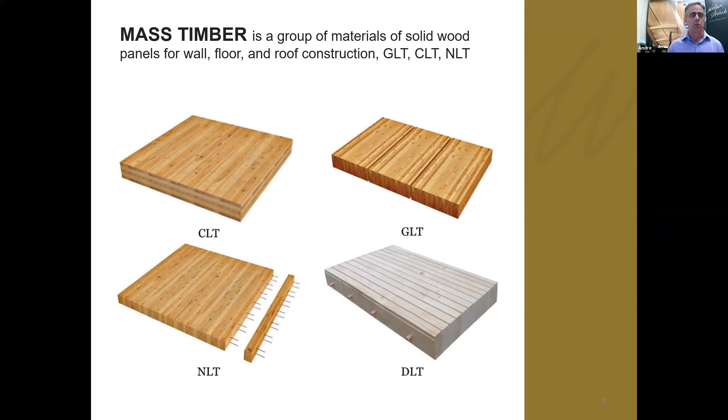So quick definition about mass timber. It's a bit of an interesting one. Mass timber is really heavy timber, but for marketing, they've called it mass timber, I guess. It's typically a group of materials, solid wood panels that have the higher fire resistance rating we're going to talk about. Some of the 3-letter acronyms: CLT, GLT - cross laminated timber, glue laminated timber, which is the one we do and know about best. NLT, DLT, and I'm sure there's some other LTs coming soon in the world of mass timber.

So by definition, glulam is a stress-rated engineered wood product, and all of the glue laminated materials fall under CSA. The ones that are mechanically laminated, i.e. NLT or DLT, do not necessarily fall under CSA standards for manufacturing. Not that that's a bad thing, it's just different because ours is processed, it has to have quality control checks to be sure that it's made the way it's supposed to be made.

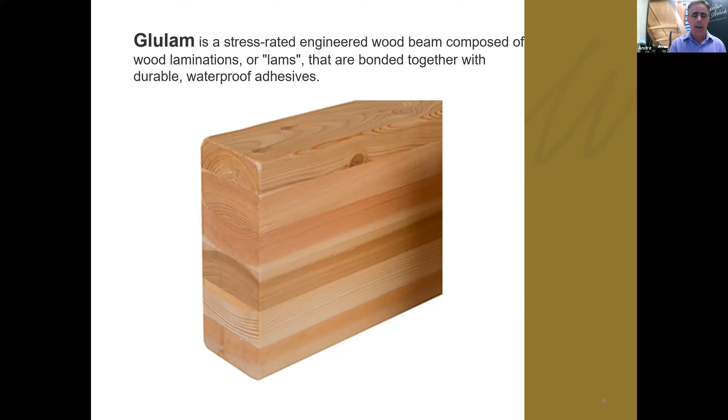So what's a major change most of you will have heard of, or that is in the proposal stage, depending on which province you're in? Alberta adopted it early. BC has adopted it in certain jurisdictions in the National Building Code, which made mass timber, or rather heavy timber, go to 12 stories. These are some of the sizes you see - I just threw it up there, I'm sure you're not supposed to do this with the building code, don't tell those people that I did this, but it gives you an idea. It's basically bigger pieces of wood that are allowed to be used to go higher, due to their fire resistance rating. We're going to talk about that a little further in the presentation.

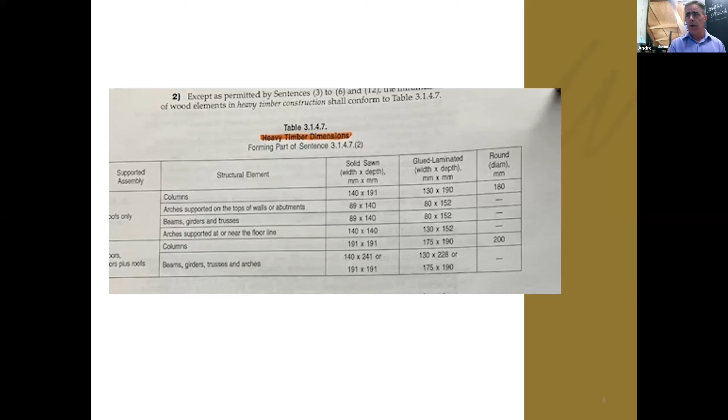But here's a mass timber project underway. They're mass timber, they're big pieces of wood.

This is just west of Edmonton, where I'm located. Quick commercial: we have two manufacturing facilities, one in Manitoba and one in Alberta. What we make is glulam. That's all we make, and that's what I'm going to talk about mostly today.

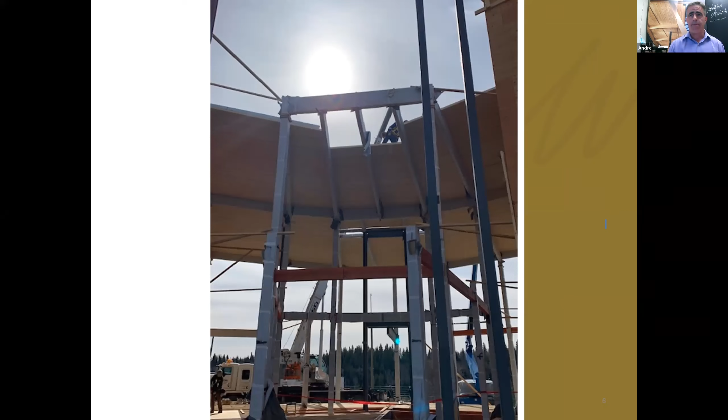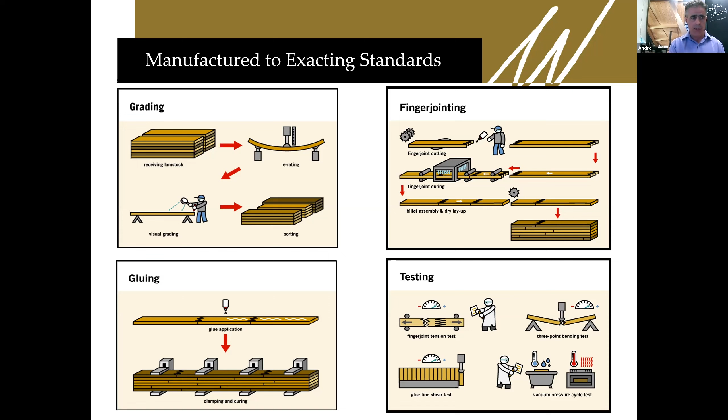As a manufacturer, this process remains similar for many of the mass timber products. All the material's graded, depending on it. It may be finger jointed - this is the glulam example I'm giving you - then face bonding, and then the testing I was talking about. There's kind of four or five, depending on which side of the border we're working on, as to how many actual tests for the product are involved.

So how do we get here? What's going on? What's changed? What's new in this wood world?

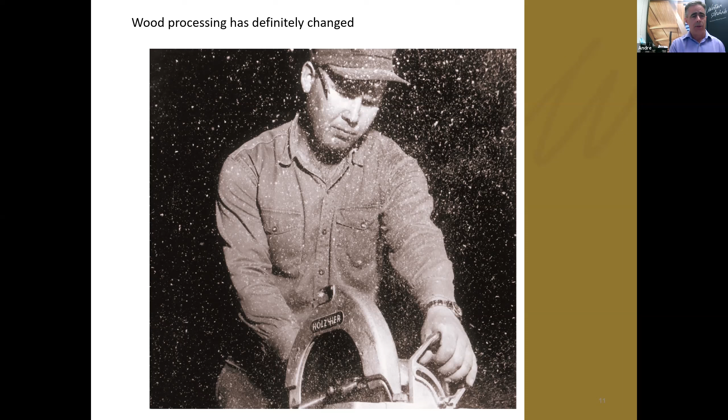This is an interesting picture - this was our plant foreman from many years ago, Robert Schneebacher. All our stuff used to be done manually with power saws and hand tools. Now it's moved to more of this big style - you can't even see the machinery inside of it very well. I'm going to show you another picture of it lately, but gantry-style CNC manufacturing has really changed how we do things in a big way.

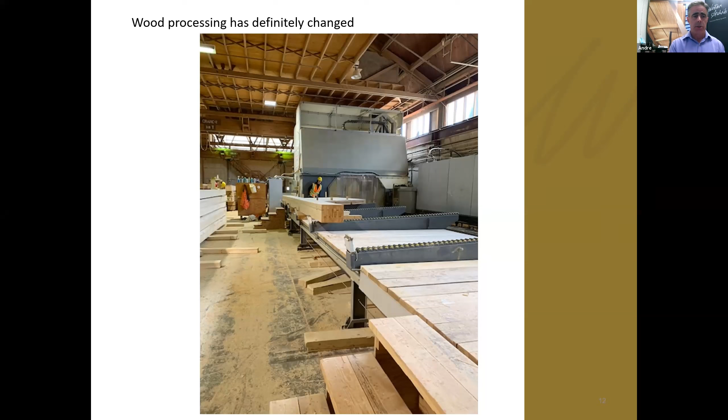So I'm going to try and run this video - I apologize if it's a bit jerky. It actually operates pretty smoothly, but this is the kind of stuff it spends its day doing, making sawdust and wood chips. It's got all kinds of little things it can do that process the wood in really, really cool and interesting ways.

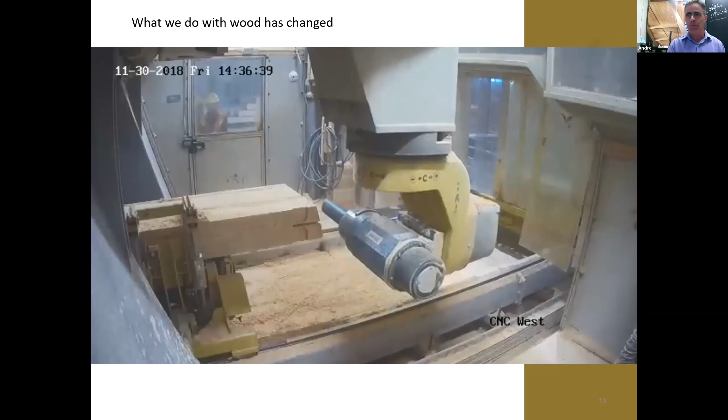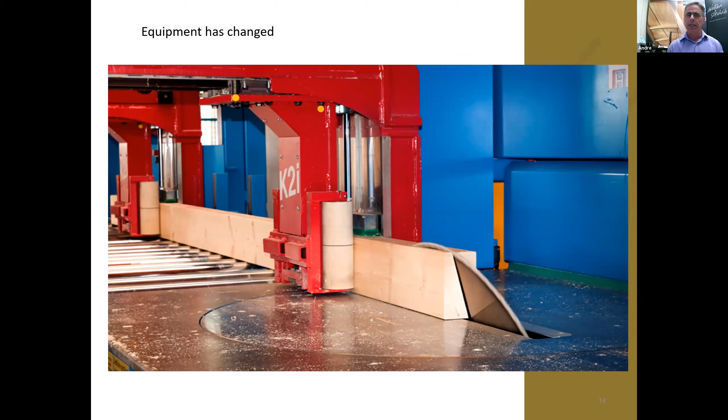This is, believe it or not, a bit of an older-school CNC processing machine called the K2i. Some of you, if you have truss plants, would know the K2i or the Hundegger Corporation for some of your other cutting. This one incorporates a lot more of the milling and the drilling that we do.

I was in the shop the other day and I came across these tools out for sharpening - drills and grinders and routers and all this stuff. The machinery I showed you reaches up and grabs a tool, one of these, and does a cut or a drill or a mill. It does some amazing stuff that would have been difficult to do economically years ago.

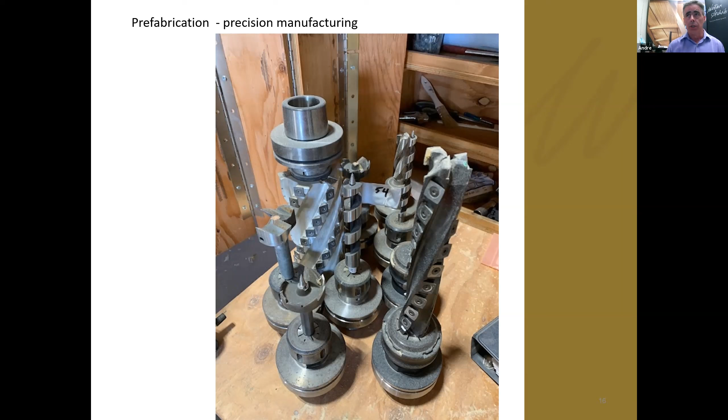Now, if the CNC can do it, it'll get done, and it gets done right. So the 4th industrial revolution, they call it, with robotics - it's on its way, and it's made its way to the wood industry too. This one is actually up and operating in our plant. It uses all the tools I just showed you on the end of its spindle. These can come in a number of different sizes, but it's changed how we manufacture and how we process what we do, and how we do it.

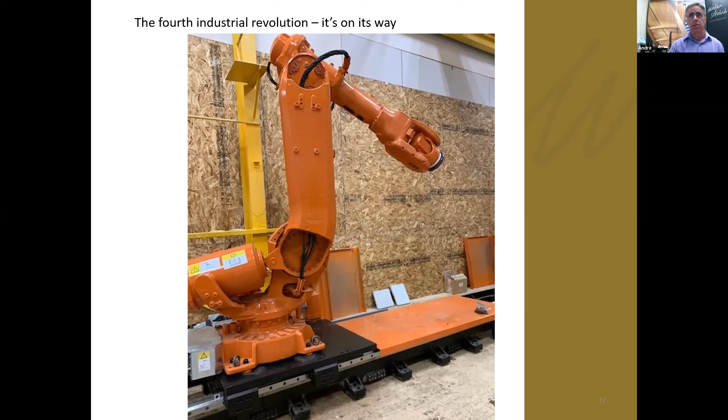Some of the other things we're looking at now is how do we get hangers installed with this piece of machinery in an efficient and effective manner. But the overall effect with the CNC technology is that it's changed how we do things, and it's changed what options are available. These types of really high-precision connections that came onto the market demanded that, as a manufacturer, our precision got really high, and we had to adapt because they were getting specified. You can't do it with hand tools anymore - it has to be done with a CNC for accuracy within 2 millimeters. By and large, if it's programmed correctly, that comes off the machine accurately 99-point-something percent of the time. It's really fascinating.

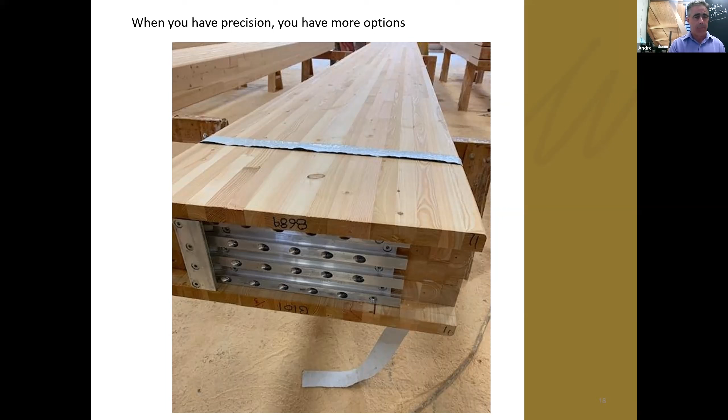So this is not a project we did, but I always like throwing this up because it's such a cool project in Spain. It just gives you an example of what can be done in mass timber given today's technology. This would have been very difficult without some of the tools we have today - not impossible, but difficult. And today it's not commonplace, this style or this budget, but it can be done.

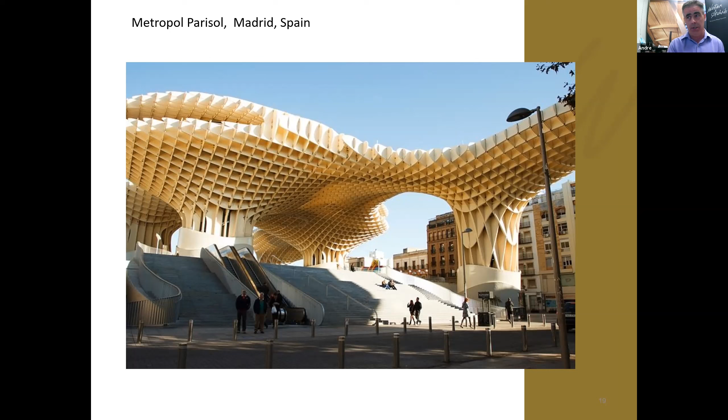So why wood? What's going on in our world that has changed why wood is being used so much more? And this relates to not just mass timber, this is all wood products. One of the things we're seeing out there was a whole two-day seminar about biophilia. If you don't know what biophilia is, I didn't know before I heard the term either, and that was just recently. Basically it's our human connection to natural products, so wood, stone, things we saw in nature that are maybe somewhat genetic in our acceptance of their look and appreciation of their beauty. And we always do it ourselves.

We always like a wood table or a stone table and that sort of stuff. Natural wood products give us that connection with nature and basically make our working or living environment more palatable. The studies that go with that say you're more productive and you're a happier person in a natural environment. So this is some of the message, not my message. I agree with it, but it's definitely a big push out there.

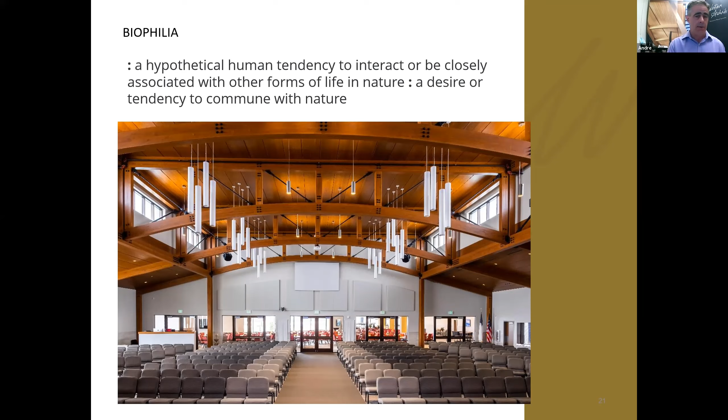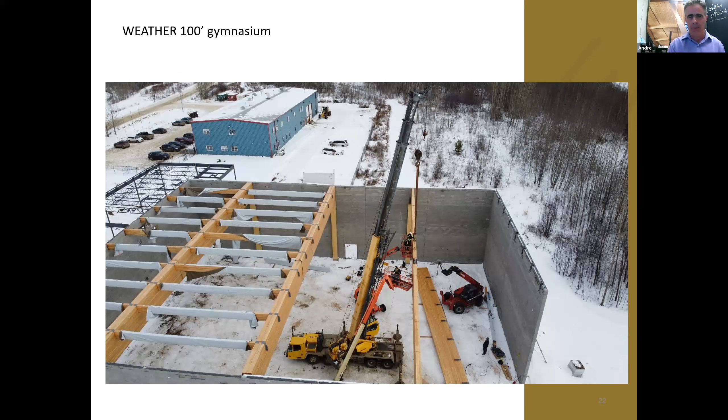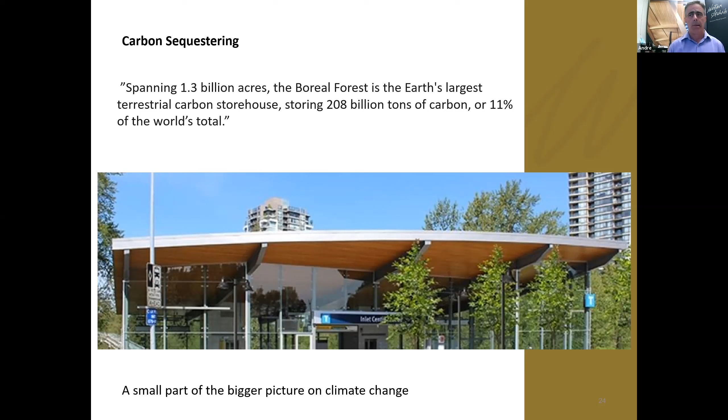Just a little bit about glulam, small pieces, almost fence post styles if you will, up to 150-foot arches that I'll show you another picture of those going down the highway. These are for a potash storage building in Saskatchewan where they all are. So lots of diversity on what can be made.

This sometimes comes as a surprise to people how big glulam can be made. But it is, this one's 150 feet long. We just did a proposal a few years ago for 175s, and we think we could do a 175 footer as well. So maybe longer yet.

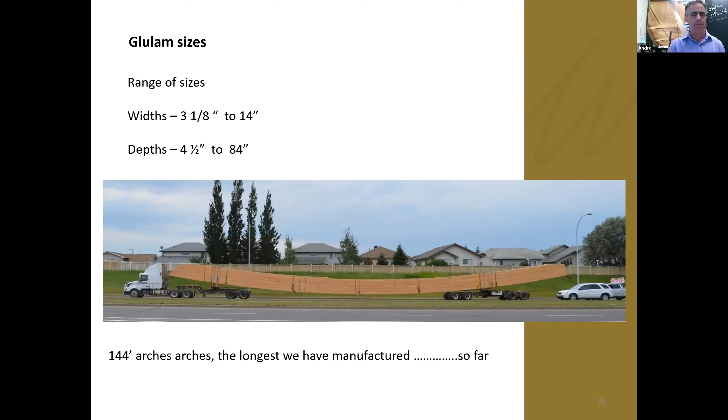So what I talked about earlier, what's changed in our industry, what's changed in wood - the CNC manufacturing doesn't come alone, it always comes with a model. So now 99% of our jobs are done with a model. The model gives us our coding for our machinery so that we can put together a complex structure. That's part of what has changed in our wood world.

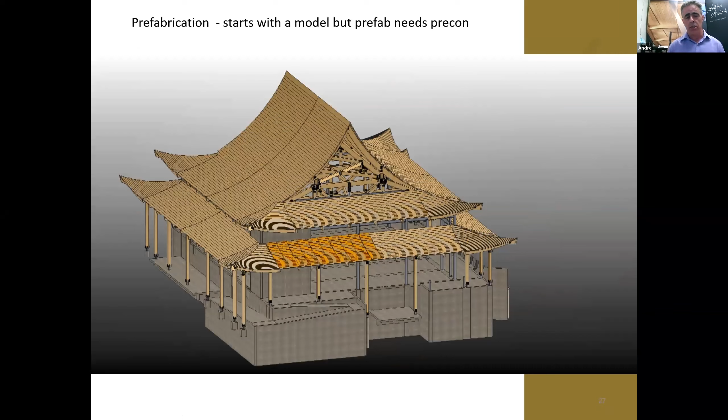The truss manufacturers have been doing this for equally as long, and the technology has followed them as well. This type of model, this is actually just a presentation model, but of course it dives into the details of all the connections, all the member sizes, all the finishes, basically everything about it. We're even seeing guys on site now with an iPad with the model on it, and they can visualize, zoom into a connection, and see exactly how it's supposed to be built.

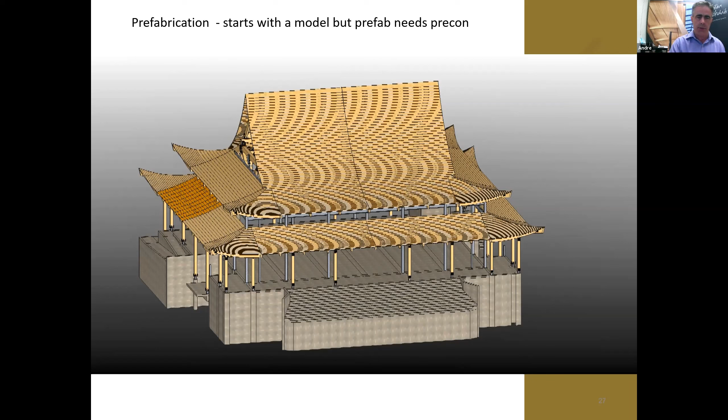And there's the product being installed, in this case a Buddhist temple here in Edmonton. Just to give you a feel for the size of it, it was an interesting project.

It was originally a steel roof that they had designed. They came in way over budget. They said, 'What can you do with this? This is how much money we've got.' And we said, 'Well, here's what we would do.' And we built it in a couple of stages.

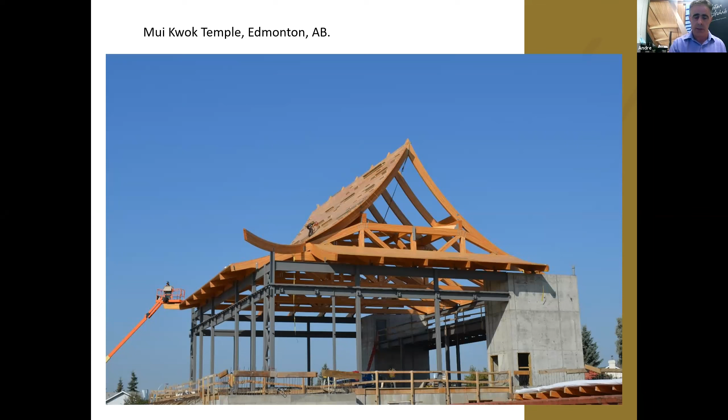You can see the truss, it's a 4-truss system, and then cross braced, and then rafters that swoop up at those nice curved angles that made up the roof, and mass timber ceiling in this case as well. In fact, glulam panels so they could follow the curve of the roof, 300 mils wide. The peak of that roof from top of steel to the peak was 12 meters, or 40 feet. I know, isn't that tall?

So prefabrication always starts with a model, but prefab needs pre-con. So pre-construction, lots of pre-con meetings, staging. You get lots of different pieces. They need to arrive at the site at the right time, in the right order, on the truck in the right sequence, so when they come off the truck they can be put in place without wasting time with staging and that sort of stuff.

Many of the sites we're involved in are in tight situations with an active street on one or two sides, no back alley access due to power lines or other reasons, and it has to be very precise in terms of how we design it and the sequence that it comes off.

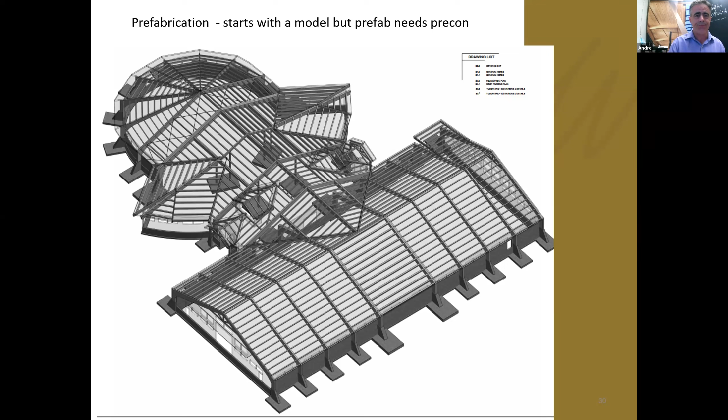So they're a Tudor arch, kind of a takeoff of the old arch rib building, and in this case, a riding arena. We weren't on a tight site in this case, but often we are.

And their shop, so again, prefabrication. In the past we would not have installed hangers. Now that is part of our scope, and that's part of what's expected from us as a manufacturer. When the beams arrive on site, or the mass timber arrives on site, anything that can be attached is attached. In this case you'll also notice the beams are pre-stained to a predetermined color, which can take just as long as the modeling process by the time we get through that piece.

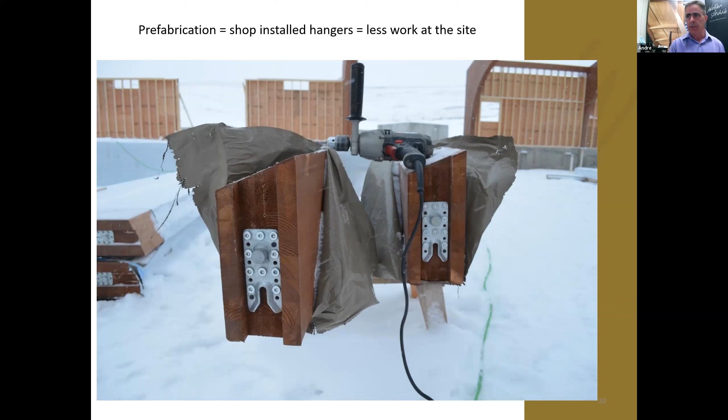So the other prefabrication, pre-assembly we're seeing in this case is a 9-meter floor panel cassette, they called it. It went so far as to have, you can notice in that connection, that the connection to the beam also had a lifting hook. So when they picked it off the truck, it already had the lifting hooks attached. They didn't have to do anything other than snap in their rigging equipment and fly it into place.

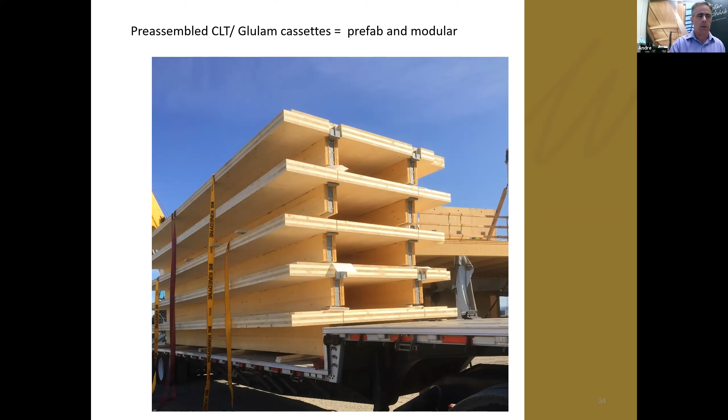What we're also seeing, and I'll just do a bit of a segue into the value proposition for a lumberyard or retail lumberyard: these offices we're seeing are getting more common. There's 2 underway in Toronto, 1 in Vancouver, 5-story. They use a lot of wood infill, a lot of plywood, and lots of other partitions can also be wood because they fall under the code for that requirement.

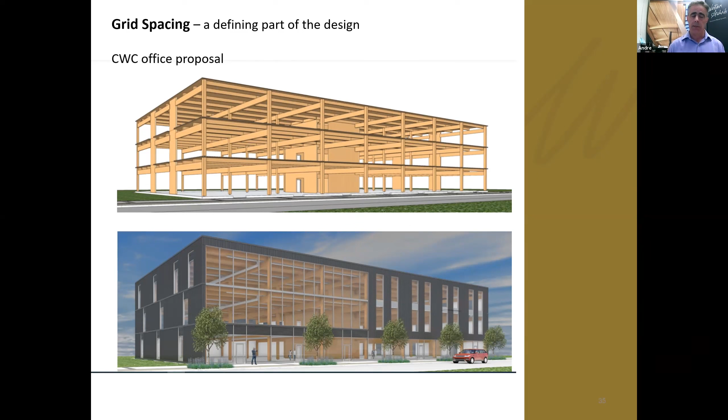The grid that's used on it is not always a steel type grid. We're getting them retrained on that - if it's a wood building, it's different than a steel one. So changing from a steel building to a wood building is not always straightforward. They'll often use a 12-meter grid, which is not as good for wood because we end up with very tall beams that impact the overall height of the building. But the 9-meter grid seems to work really well for wood structures.

So in fact, the wood in this case protects the steel. I know some people have a bit of a reaction - well, wood burns - and yes, wood does burn, but it also protects. If you have enough wood... anybody that's gone camping and tried to light a really big piece of wood with a single match or lighter knows that's not how it's done. It's small pieces first, then building up to a bigger fire.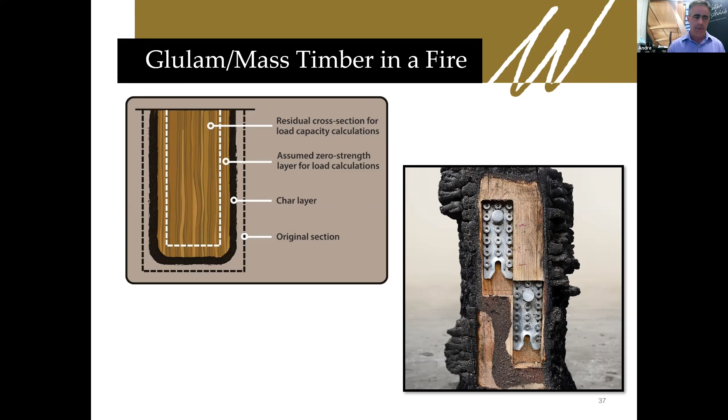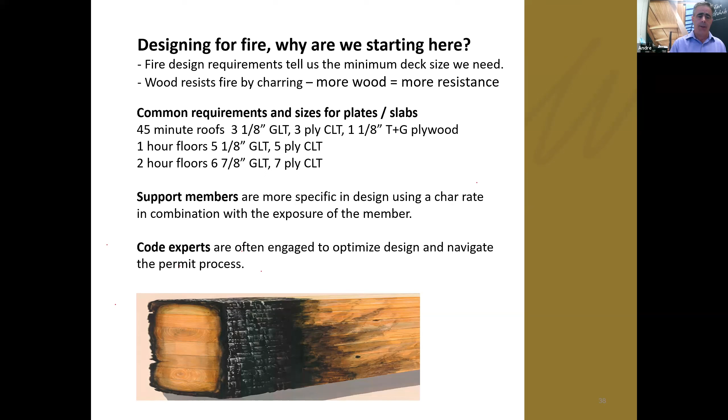But the charring effect is known, documented, and proven. To that end, there's a 45-minute to up to a 2-hour fire resistance rating that can be achieved with glulam members, and not just glulam, CLT and other members as well. But when in the design stage, this is often a question that comes up: how am I going to design that for fire? These are some of the solutions that come out of it.

We did this on our glulam timber panels that we use for commercial projects. We actually had a fire test done on it, using it as a panel, not a beam, so it's a bit of a different application. The code didn't really address how it would perform. If you use the prescriptive method with the building code for a 5-inch glulam deck, it would have given you a 1-hour fire resistance rating. When we put it under load and under test that FP Innovations did for us, it actually came out as a 2-hour fire resistance rating, and the 6 7/8 a 3-hour rating, and it was under applied load, not just sitting there on its own weight. It was proven to be much higher than the prescriptive method that the building code uses.

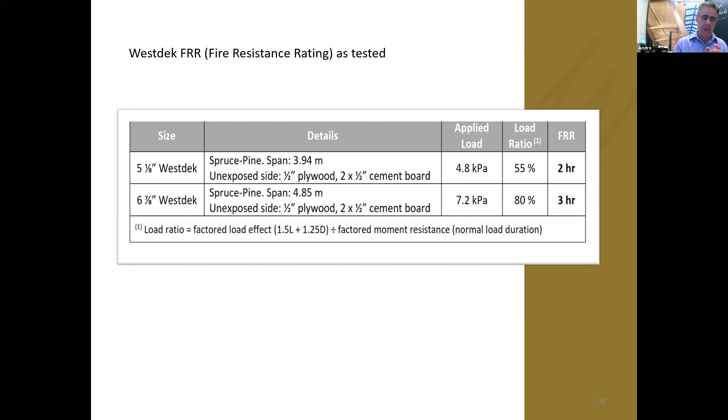So GLT, glulam timber panels, one of the mass timber products, kind of glulam standard sizes that's available. It's got some neat features in that you can hide a lot of the fire suppression and electrical systems up inside. With a mass timber structure, of course, you want to see that structure from underneath, so you really don't want to see all the electrical and fire suppression. So a lot of effort is made to hide it, put it on top of the structure if possible, and sometimes it's just not possible and has to be below. But going through that extra effort does take, again, back to the pre-con, more time, more effort. You have to think about it and plan in advance.

There's another project under construction.

And by the way, if anybody needs to take a drink or stop and have a snack, go ahead. I'm going to do the same.

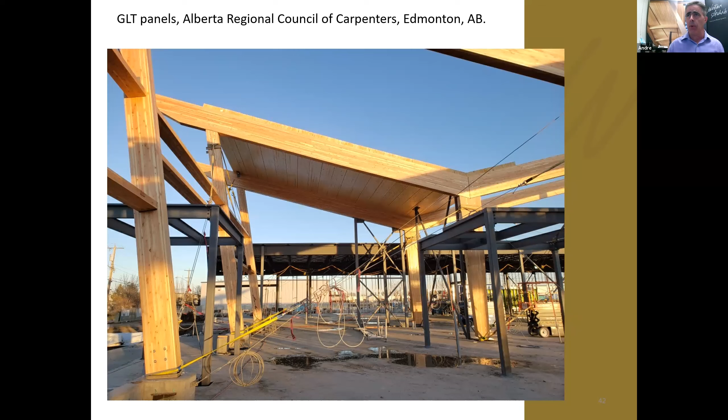So, sorry, what I meant to say about the grid earlier - they've got a proposal for budgeting coming out this spring still, I think. Better do that soon, spring's almost over. But they did a costing analysis of mass timber projects just to show how the competitiveness of it would be, actually using old lumber prices. So I think the delay is they're doing some updating on it, which no surprise, it's changed.

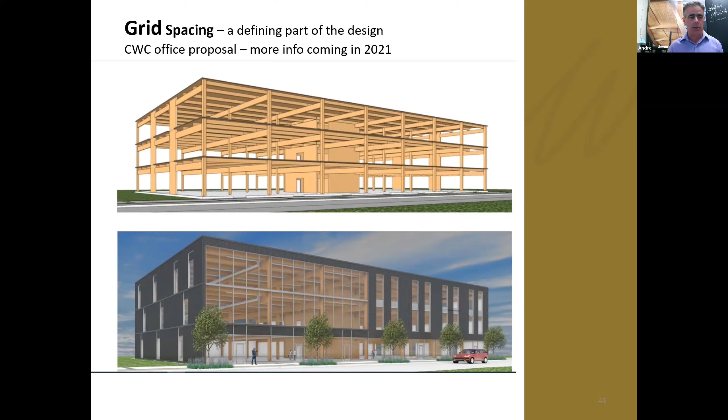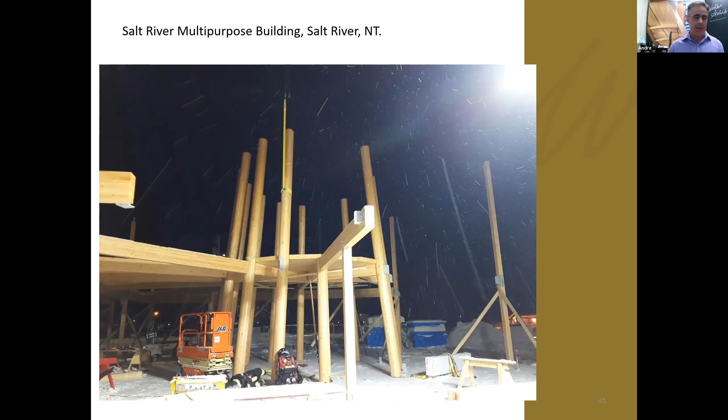So some projects I wanted to show you - this one, I gave you a bit of a glimpse of a Salt River multi-purpose building. I used that as an example of building in the north, in the cold. This one was put up in January of 2019, I believe, and they had some daytime highs when they were putting this up that didn't get above -25. So it was very cold, but they had a deadline. They had short work days and obviously short light, but they got it up in time for their deadline. This is sort of later on in the construction sequence.

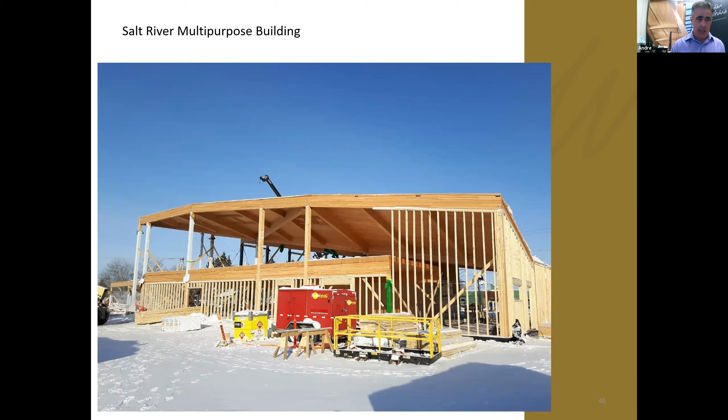Again, for the value proposition - mass timber buildings, as you can see, sheeting on the outside, 2x material for the infills, all supplied by the local supplier. With their tight deadline, it was kind of a cool building because when they say multi-purpose, it truly was. They had an open recreation area, a courthouse, and that was the pace they had to get the building up and ready for a court date that somebody had in the spring, some big case. I'm not sure what it was all about, but they were very adamant that they wanted it open by, I think, July 15th, because they wanted this criminal put behind bars, and they wanted to do it in their new facility. So the picture I'm showing you here includes the courthouse, council chambers, a commercial kitchen, cultural space, and they actually added in some lease space as well. Kind of a cool project.

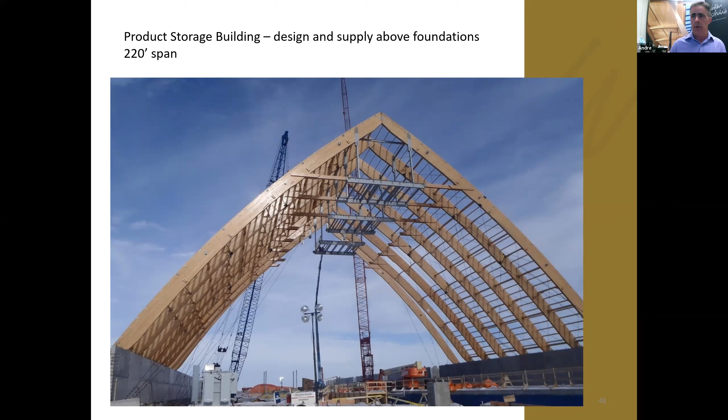Some of the potash storage buildings we did in the early years of Western Arch Rib, in the late 60s, early 70s, are still in use today. The methods behind it all work very well.

Speaking again to a slide I had for that US presentation, where they said you can't build like that in the winter—well, this one took a year to put up, so yeah, you can put it up in the winter. Bit of a higher profile.

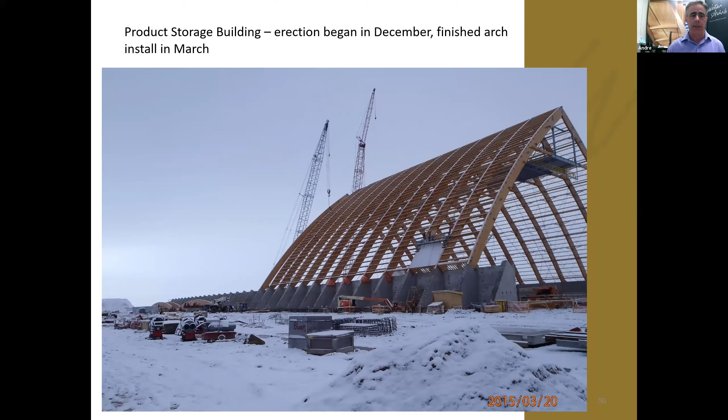Again, hopefully for many of you this is a word learning day. We covered biophilia, that was a new word for me, maybe I was just not schooled well. This one, a catenary roof.

For those who don't know, and I didn't before this project either, a catenary roof is a roof held in tension. The members are glulam held like a rope, with no bending component—simply tension only. You can see by the size of the members, I believe they were 130 by 400, really slim, and for about a 130-foot clear span it's quite amazing. Amazing engineering behind it, and it turned out really good. This was done, I think, about 4 years ago.

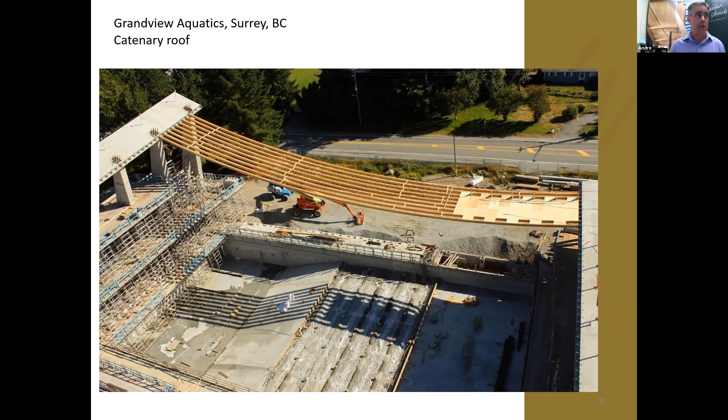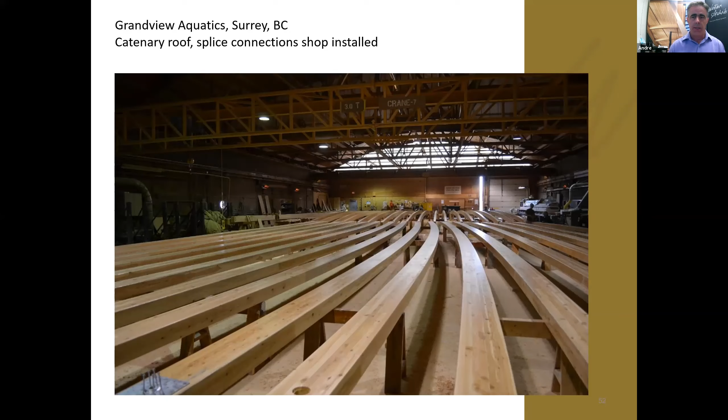There's the catenary roof members in our shop, laid out and having a coating applied to them. You can see in the bottom left part of the picture, the connections were all pre-installed, so when they got to the site, the installer was able to put it together fairly quickly.

You can kind of see those splices in this location and that other location—it actually came as 3 pieces, for ease of shipping or for legality of shipping, because 130 feet is pretty tough to ship into the density of Surrey where it went. But with that, the roof went up in 12 days, so pretty amazing.

A 95,000 square foot roof—I wanted to show you also that plywood on the roof, double layer 3/4 inch T&G fir plywood. So again, where's the value for the retail lumberyard? Well, that would have all been sourced through somebody.

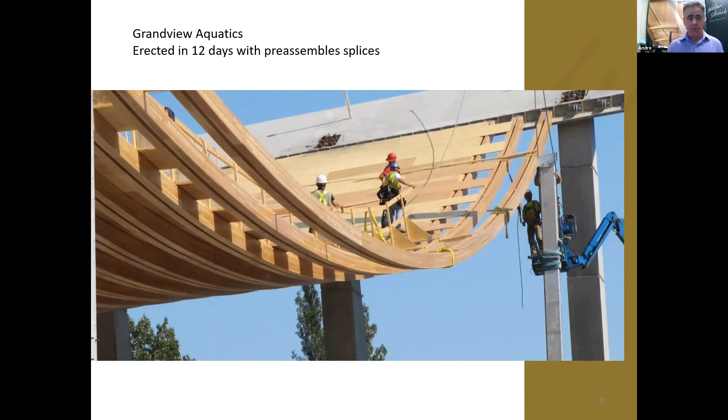Project in Spokane, Washington. I showed you this composite panel in an earlier slide. Some of the changes you see in a mass timber building: columns going straight through rather than beam on top of the column. That's simply a function of economics—you want end grain for higher bearing capacity.

When you get those stacked loads, in this case I think it was a 5 or 6 story building, the accumulated loads get pretty high and you can't bear on edge grain. So that's just a bit of a difference, some of the things that happen in a mass timber building.

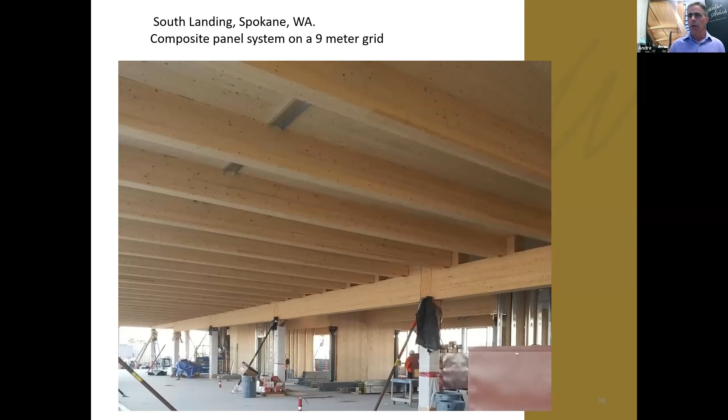There it is under construction, the mass timber panels over to the side, ready to be flown in. I believe this is just across the river from the university. There it is, the finished building.

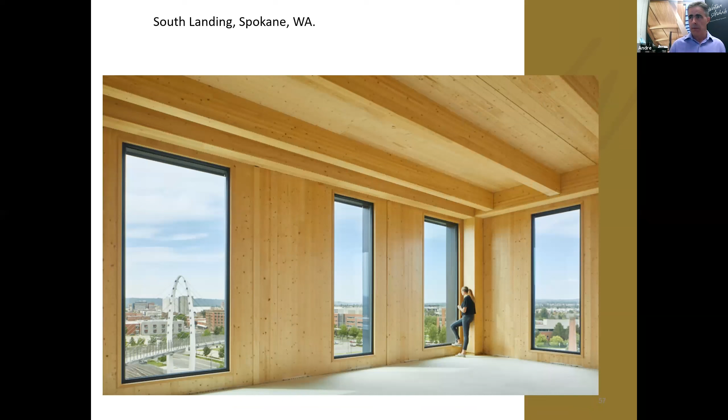It used CLT floors—we did not supply that part nor the walls, but we did all the glulams and the attachment to the CLT. And there we are, Spokane finished building, 1, 2, 3, 4, 5 stories.

Canada Olympic Hockey Training Facility, Calgary. I believe this one was built in 2010. When Hockey Canada is doing their training for the Olympic teams and some of the games too, it's an Olympic size rink, which is a bit rare, with nice seating, and glass on the outside to let in natural light, which is also a bit rare for an arena.

So it really is a beautiful place to watch hockey, and curling. This is where a lot of the tournaments, or bonspiels, were held this winter.

Every time it came on, I pointed it out to my wife. She says, I know you told me that last time, but I pointed it out anyway. This is kind of funny—to me it's kind of funny.

Seeing the virtual people in the stands, and yeah, they held I think 3 or 4 curling bonspiels there this winter.

Algonquin College, Ottawa campus. Anybody from Ontario may be familiar with this building. This was done by our partners in Eastern Canada, Timber Systems.

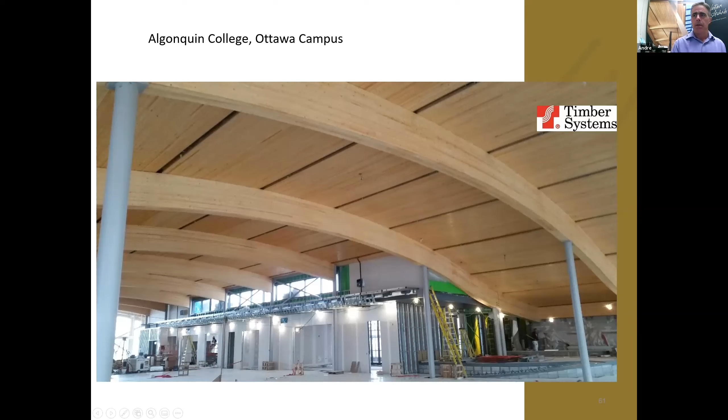Speaking about biophilia earlier, this Tye Farrow is all about biophilia. He says places change your mood, increase your ability to function at a higher level.

Another shot of a similar area in the building. But again, without that technology, without pre-construction, CNC technology and modeling, this would be a difficult project to get up in an economical fashion.

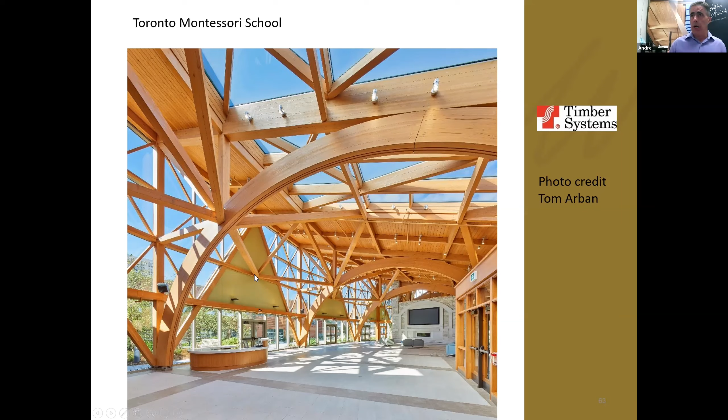The school in Washington, again, this used all CLT walls, ceiling, roof, and then glulam beams, walls, columns. And of course, we've done glulams in schools for many, many years, and the popularity of that is coming back.

Again, if you can get wood in a school, if we can get glulam in, the other products that go for light timber framing, the I-joists, which most schools, if they're not too large, still fall under that building code category that allows it to be built of wood, then it's a great value proposition for retailers that have the engineered wood products and light frame wood.

This is an older school in Wetaskiwin. I like it because it used, I think, 100-foot trusses, and it's just a nice description of how it can be done. Of course, now we would try and convert that steel roof into a mass timber or a light frame timber ceiling roof.

And this was an interesting one. This was, if any of you have been involved in an IPD project, an integrated project delivery system, a contract method where all the partners are involved. So you go through a very rigorous vetting system for the material - it has to be the best application for the job.

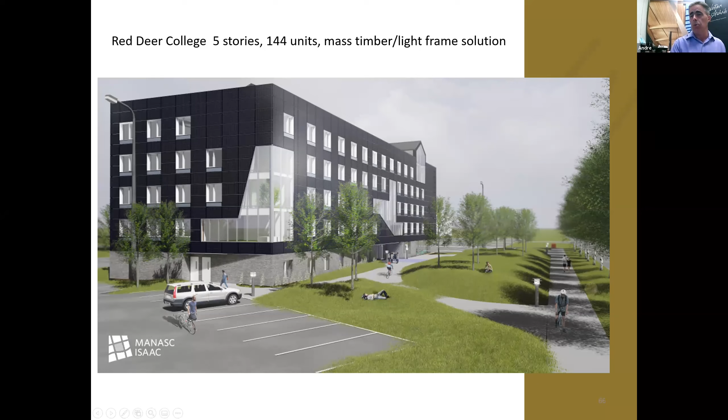So with that, the system they landed on was 5 stories of a combination of mass timber and light frame timber. This is what it looked like under construction. So it read like a light frame timber building. You think, well, you can even go to 6 stories - they didn't need it, so they didn't use that.

But at the main level, they integrated a steel transfer slab. And steel, again, or even over concrete, was chosen based on it being the best material for the system, as was the light frame timber walls that had the ability to run - this is a typical unit.

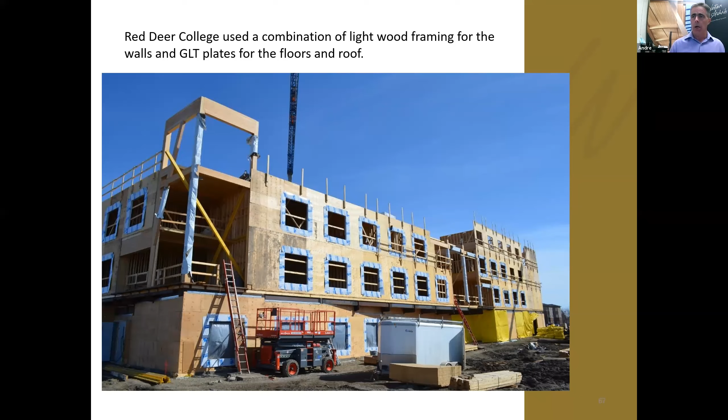So on all these corridor walls, you were able to run all the services vertically and efficiently, leaving a gap in between. And as you know, with creating a party wall or a shared wall and staggering the joists or 2 walls, you have a great ability to run services vertically, provided they're all stacked. Of course, the owner messed that up a little bit at the main level by using a transfer slab that caused a lot of gyrations and changes at the main level, but all the units above were completely stacked.

And there you see a student who normally would be studying, but he likes the building so much he's just out there hanging around and doing what he shouldn't be doing probably. But truthfully, at this college they did create some really nice common spaces. Again, speaking to that biophilia, just a great place to hang out.

I like to call this the Harry Potter School of Magic. It's not - it's a private school in Shawnigan Lake, Vancouver Island. But again, if it's a mass timber structure, chances are the materials around it are going to be wood too, and chances are that's going to be a good opportunity for others in the wood business.

This is used in a lot of different elements, not the least of which were mass timber. You can see the CLT roof, glulam beams, solid wood decking. Kind of a hilarious part about it, they did spec and put timber 3x6 timbers over this curved roof as well, but it was not without its problems, so I think they wouldn't do that again. But again, without modeling, you can see by the complexity of the geometry of this school and community center, this would be a lot of work without that technology, and it really lends itself to having that flexibility and accuracy.

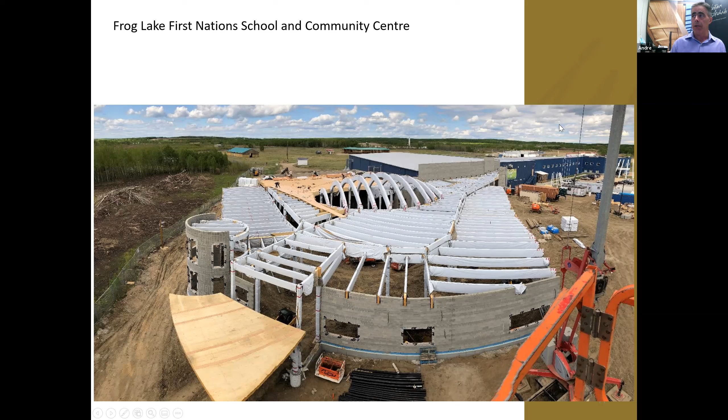Again, our partners in Eastern Canada, Timber Systems, put up this school in King City, Ontario. Again, all for the most part a light frame combination mass timber building that uses wood and has some just beautiful spaces to it.

The EFCL Plaza Edmonton. This was really kind of an interesting project. I was just there on Sunday, in fact. They attribute it to all the community leagues in the Edmonton community that have donated their time over the years. So a real nice nod by the city of Edmonton to all those volunteers and organizations that contribute so much to society. They put up this pavilion. Of course, being in Edmonton, this is a skating rink in the wintertime and a lake in the summer. So a beautiful spot.

And although the rumors would have it that I flew the drone and almost crashed it at this building, it's not true. The drone flew through here. I didn't put any of those clips in here, but let's just say there were some nervous people around when I was flying, and probably for good reason.

Another Buddhist building, and we're not limited to Buddhists in terms of the religious buildings that we put up, I just happen to have the Buddhists do really cool structures. So the nice curvaceous elements that they like to add really add to the beauty of the structure, I think. And these owners are really engaged. They came to our shop and they were touching the beams and feeling the structure before it even went up. It was kind of neat to see an owner that engaged in their building.

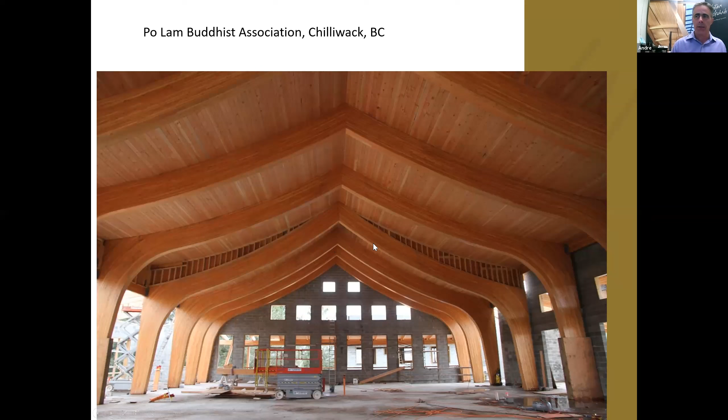This one in Chilliwack, BC. Fire Hall, Port Moody, BC.

Also, you'll see the combination of wood and steel roofing. What we're seeing in the mass timber world now is they won't use steel roofing, they'll keep it all a wood building if it works out. They always like this building because it's a great example of protecting the wood from the elements, how they pulled these beams back from the eave so they had at least a 45-degree angle away from the last point of protection. So they'll see great durability in this project as the years go on. I like it because sometimes the biggest resistance we get with wood is from firefighters and the fire commission. So putting it in their building gets a little bit of buy-in, I think, in terms of them accepting wood.

We're working on a project on Vancouver Island right now, Malahat Skywalk. This is kind of on the top of a mountain, as you can see. This goes up, I'd say 100 and some feet, to have a great view of the inlet and the surrounding area.

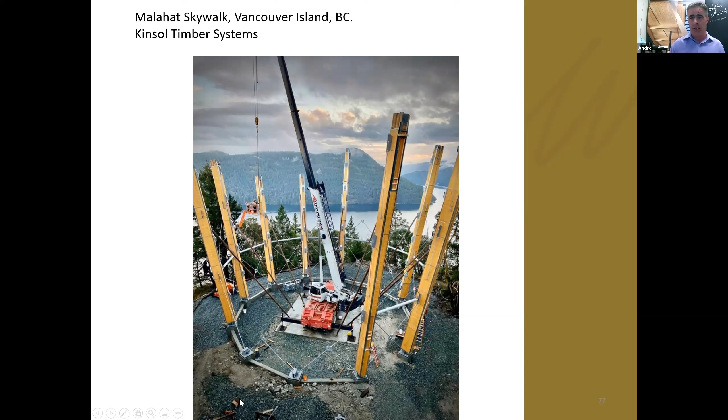So the Canadian Wood Council, I know it sounds like I'm doing an advertisement for them, put out this design options for 3- and 4-story schools in BC because their densification is getting so high. We're seeing that to a lesser extent in smaller cities where I live, like Edmonton, Calgary, Winnipeg. Land is getting scarcer, they're building on old sites, they want a bigger school, so now they have to go up. So 3- and 4-stories are going to be very commonplace in BC, but I think the rest of the provinces can learn from this too, in that wood is an option. This is an online document anybody can pull off the internet, you don't have to live in BC, and it gives some great options.

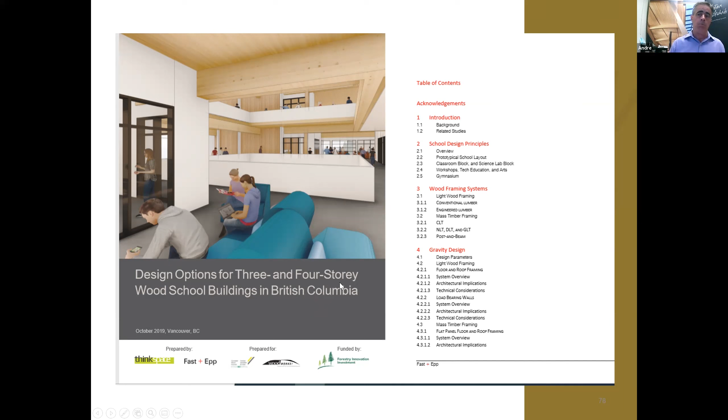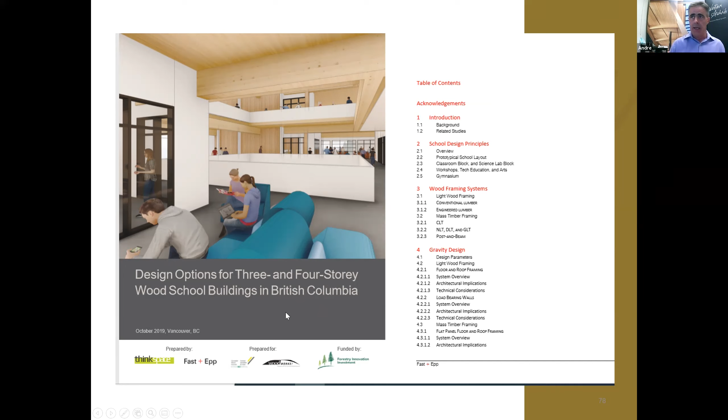So when we get into this sort of stuff, the diaphragms are often wood shear walls, with other elements like light framing walls that can be done in wood as well. So it's great for the wood industry to have this kind of thing in its back pocket to promote. It shows a bit of a cross section, and it's certainly not fully developed, it's a conceptual look at it anyway, but it does give overall building heights, which is always a concern and always one of the first questions that comes up when we're going to mass timber, because it's not the mainstream and not where it's usually used, and everybody needs some satisfaction that it's going to work out in the long run.

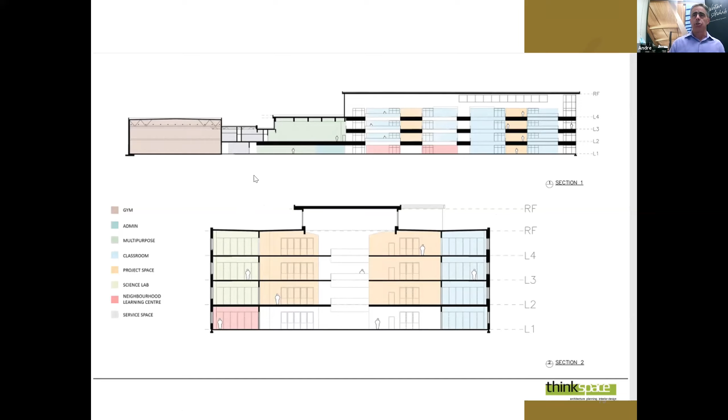So this project, and the last two projects I want to show you, they're both recreation centers, so to speak. Clayton Community Hub, Surrey, BC.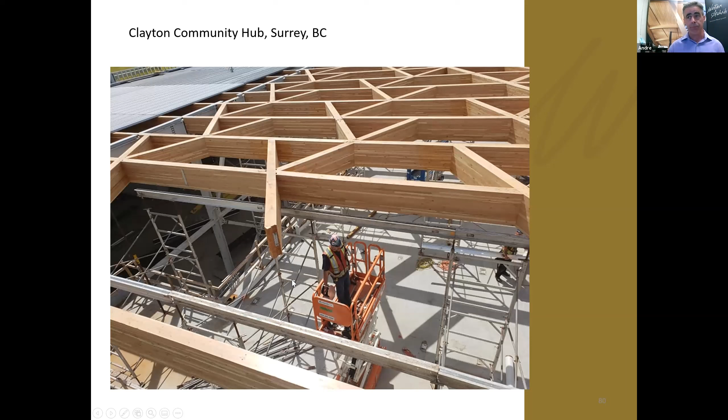There they are, the pinwheels are being assembled. They were too wide from the top edge to the other long side to be shipped in an economical fashion, so they were assembled on the site.

But as I mentioned earlier, anything that can typically be done in our shop, they'll always request that it be done in our shop, or that we price it out. And it's usually accepted that it's done faster in a controlled environment rather than on a site.

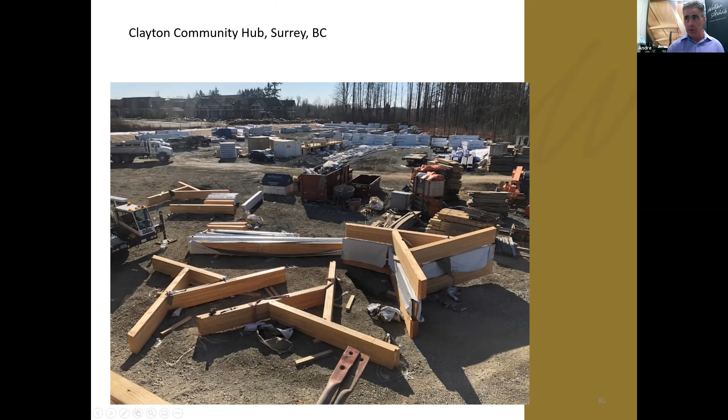So there they are installed. This member carried most of the load, so it used two of those connections I showed you a picture of earlier. A lighter loaded member used only one connection, and in fact this uses the screws I showed you in that picture. It's just a screwed connection that didn't receive much load, the screws could handle that capacity fairly easily.

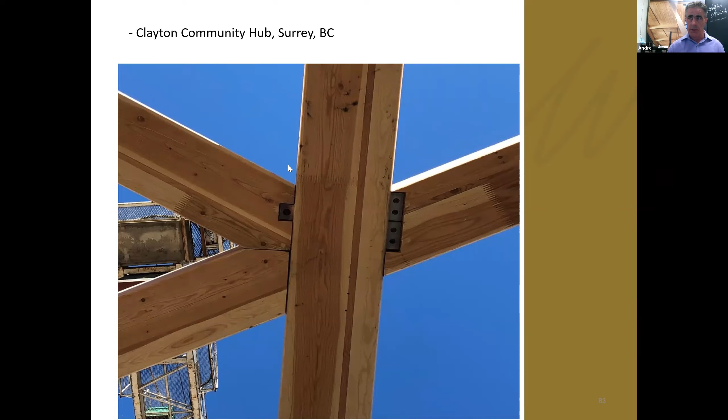Here's an aerial view, so all this reciprocal system is in one main area. It did start spilling over budget at one point, so they said, well, can we just go straight beams here? So we ended up changing that over from the reciprocal system to these straight beams, which ultimately looks really good too.

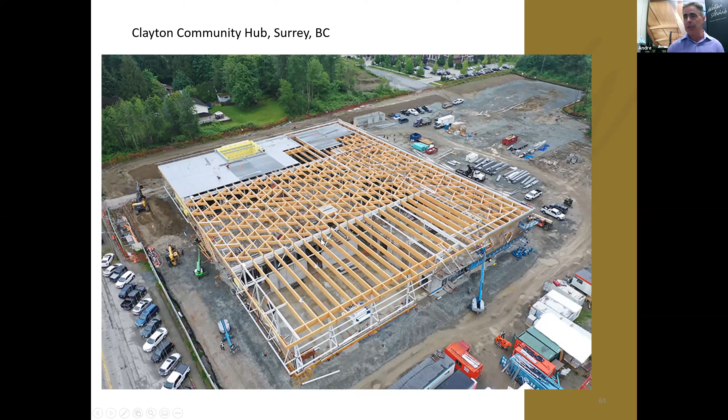There we are. The other interesting thing coming out that plays a big role is passive house, really super-insulating a building, or a house in this case. That passive house movement is definitely afoot, and wood, whether it's light frame or mass timber, has those inherent natural properties of insulating that speak well to this type of system. So expect to hear more of that if you haven't heard of it already. It's not a new word, but it is a new term out there, passive house. This Clayton Community Hub was one of the first commercial buildings to reach passive house standards in Canada.

The expectations for this project, Hayward Field, Eugene, Oregon — the owner, Phil Knight, founder of Nike, had very specific requirements that they wanted to show on this project. So they went over and above. They really had a strict spec, strict requirements. They came to our shop and inspected the wood before they came, the input materials.

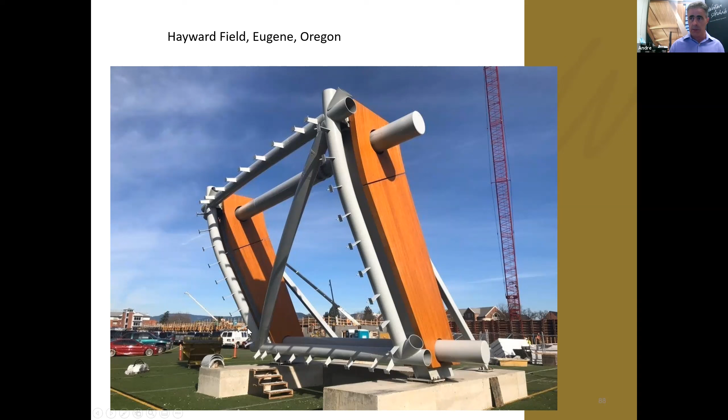And they had a special skin panel, a clear skin — I forget the name of the poly-something or another that goes on the exterior of this. But there they are. It was a 3-piece system, so they used a rafter, a haunch, and a leg. And you see here this.

It looks like the haunch piece is being flown into maybe this side over here, but it had to go in sequence so that it was erected before the steel was threaded through the opening in the wood.

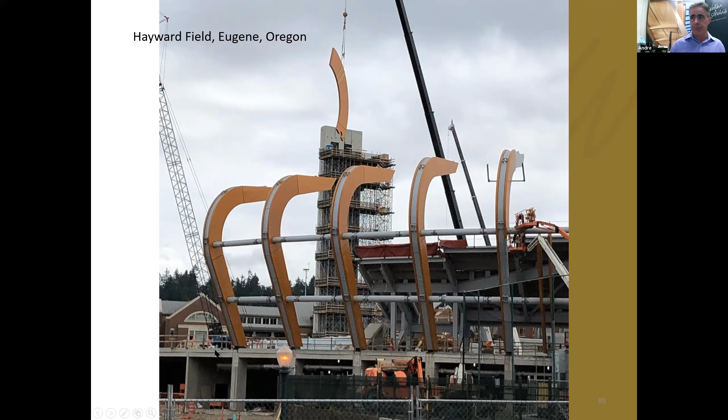So there we are, Hayward Field. This is the stadium, this is actually a rendering. It was due to open about a year ago, but of course with COVID it didn't. It's used for the US Olympic trials.

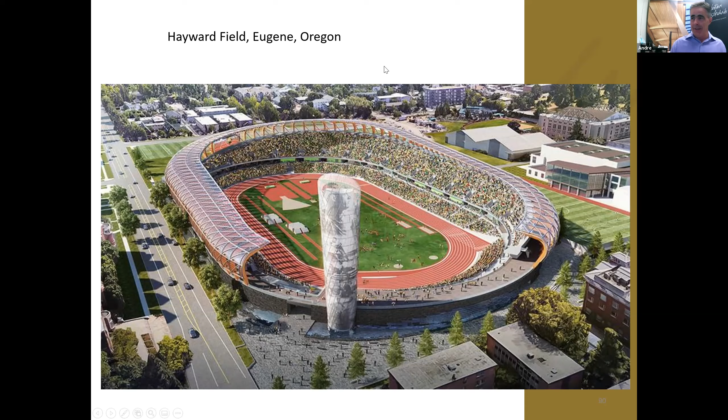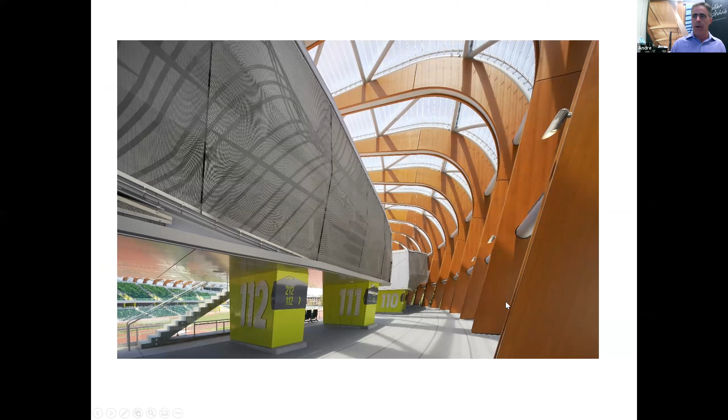Our challenge was this, I'll show you in the next picture. The elevation of the roof changed from one corner to the other, so every piece is unique, every piece is different, 565 different pieces that had to be modeled. Quite challenging geometry, needed robust modeling attached to it, and details, connections, pre-con, prefabrication - all the elements were paramount for success on this project.

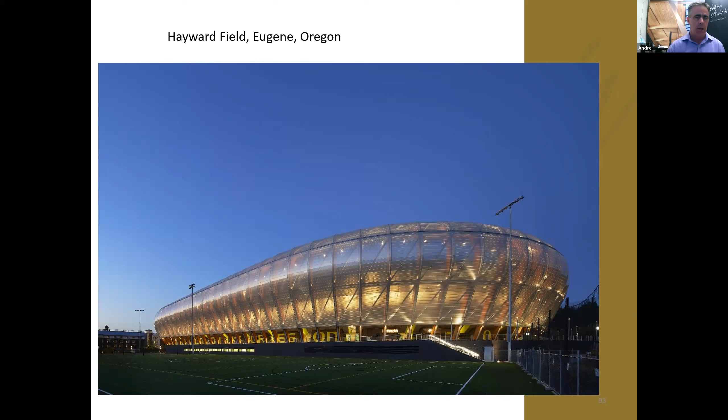And it turned out the construction of it went very smoothly from our side, because we had done all that work, and the GCs recognized that. It certainly pays a dividend in speed of construction later on. So that's most of what I have to present to you, except for the wooden question mark.